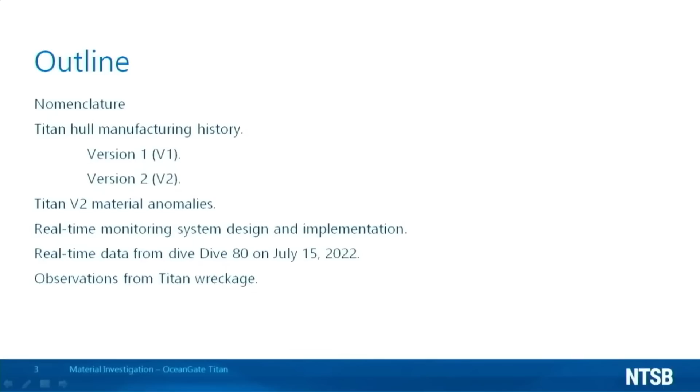Today, I'm going to present some results of the Materials Group investigation into the implosion of the OceanGate submersible Titan. After some nomenclature, the presentation will be broadly divided into two parts. In the first part, I will describe what we have learned about the construction of the Titan's composite hull and the implementation of its real-time monitoring system.

I'll briefly discuss the version 1 hull, then move on to the second, or V2 hull.

This hull was manufactured using a multi-step co-bonding process that was different than the V1 hull in that it contains multiple adhesive bonded joints. We were able to examine some material from the manufacturing of the V2 hull, and we found several anomalies within the composite and the adhesive joints, including waviness, wrinkles, porosity, and voids. I'll show examples of those as well as some features consistent with rubbing damage at one of those adhesive joints.

Next, I'll recap the Titan's real-time monitoring system. I'll talk briefly about the principles behind these methods and review how OceanGate implemented them on Titan. The second part of my presentation will focus on changes in the mechanical response of the hull following Dive 80 and observations gathered from images of the wreckage on the ocean floor.

I'll show that the Titan's real-time monitoring system detected the loud bang that we've heard about previously, and that the strain response of the hull changed on subsequent dives after the bang. I'll finish with some images from the Titan wreckage. These will show that the composite hull experienced substantial delaminations at or adjacent to two of the hull's co-bonded joints.

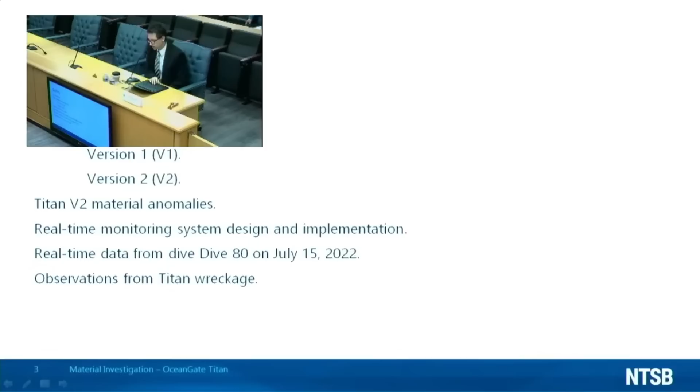I'll begin with some basic nomenclature. The first term to define is composite. A composite in general is any material made up of more than one material, but as applied to Titan, it refers to unidirectional carbon fibers that are embedded in and reinforced by a hardened polymer matrix.

OceanGate utilized several methods of fabricating composite structures from unidirectional fiber. One was wet winding. For this method, the fiber starts out dry and is dipped into a liquid resin bath by the user at the point of use.

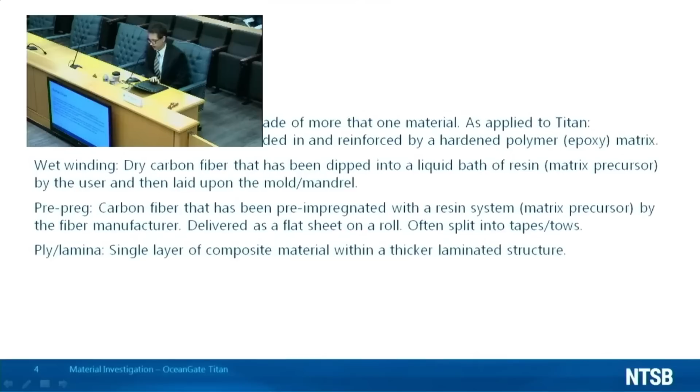The other is pre-preg. In pre-preg systems, the carbon fiber is pre-impregnated with resin by the fiber manufacturer, and is often delivered as a flat sheet on a roll. It can then be split into tapes or tows.

Here's an example of a pre-preg splitting operation. This is a comparatively small machine and would probably not have been sufficient for the amount of fiber that OceanGate needed for Titan, but it illustrates the idea of splitting.

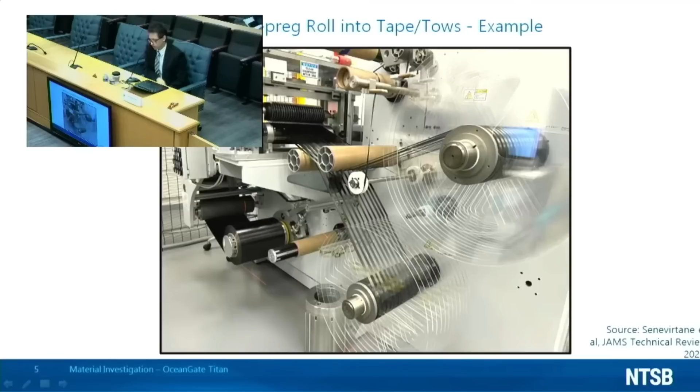A rolled up sheet of pre-preg is loaded into the machine and is sent through a series of cutters, producing a large number of tapes or tows. The tows are then rewound onto individual spools.

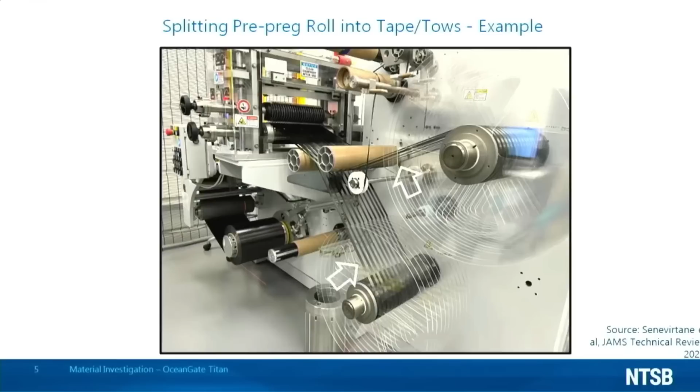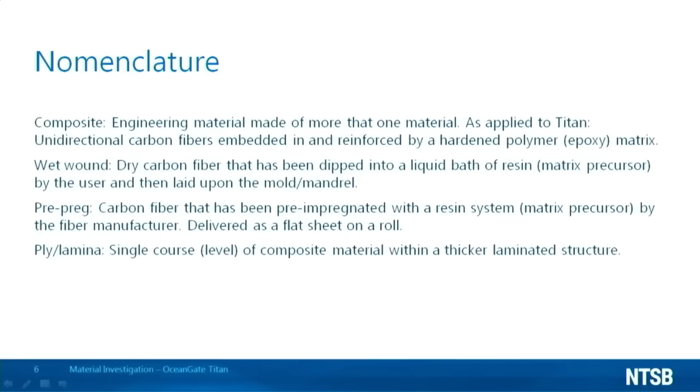One of these individual tows could contain thousands or even tens of thousands of individual carbon fibers, depending on its width and thickness. The pre-preg tapes we saw in the previous slide are clearly very thin, so objects built up using layers and layers of these tapes will have a laminated structure. One course or level of unidirectional material is a ply or lamina.

I'll now discuss the manufacturing of Titan's composite hull. The Titan V1 cylindrical composite hull was manufactured in 2017 and was at the core of the Titan pressure vessel. The hull was manufactured using a combination of wet wound fiber for the circumferential plies and pre-preg for the longitudinal plies.

The ends of the cylindrical hull were capped by titanium rings called segments that were glued to each end. The segments in turn were mated to hemispherical titanium domes that were bolted on at either end, and the forward dome contained an affordance for the viewport.

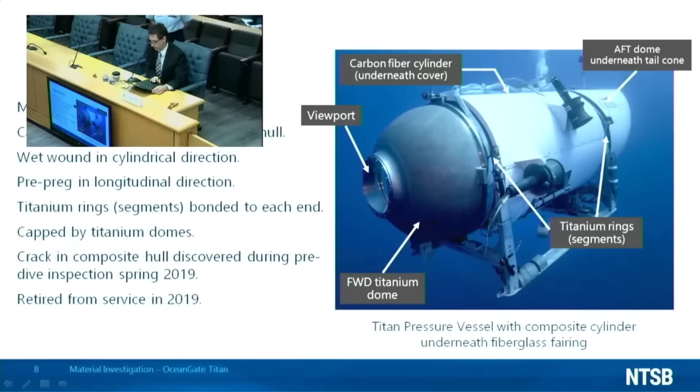As previously noted, a crack was discovered in the composite hull and it was retired from service in 2019.

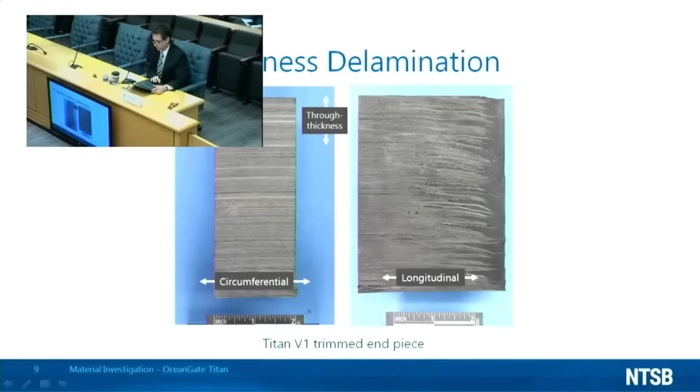Investigators had the opportunity to examine a leftover piece of the Titan V1 hull. The hull was originally manufactured with excess material at both ends, and then the hull was trimmed to size. The leftover piece was trimmed excess material from one of those ends.

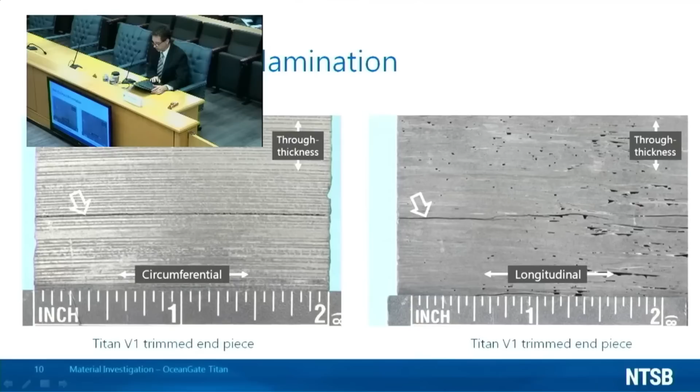The piece contained voids and delaminations. One notable delamination was located about mid-thickness and is shown from different directions in these two images as indicated by the white arrows. After OceanGate retired the V1 hull, they manufactured two 1/3 scale test articles.

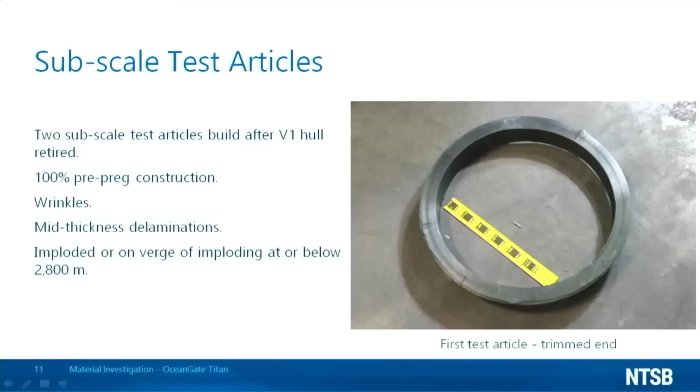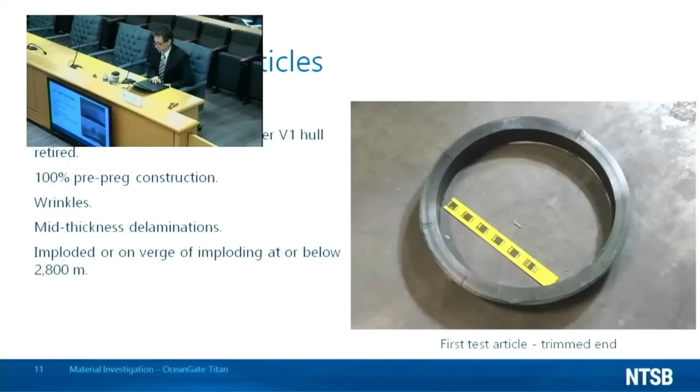Just like the Titan V1 hull, those cylinders were manufactured with extra material on both ends, and then the cylinder was trimmed to size. One of those trimmed end pieces is shown in this image, and in greater detail in these images.

The trimmed end piece contained two notable wrinkles and a mid-thickness delamination as indicated by the arrow in the upper image.

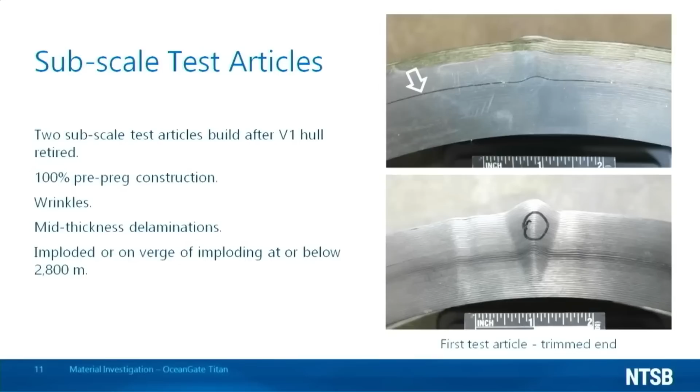According to multiple former directors of engineering for OceanGate, both subscale test articles imploded or were on the verge of imploding at or below 2,800 meters. OceanGate identified wrinkles as a likely cause of the low implosion pressure.

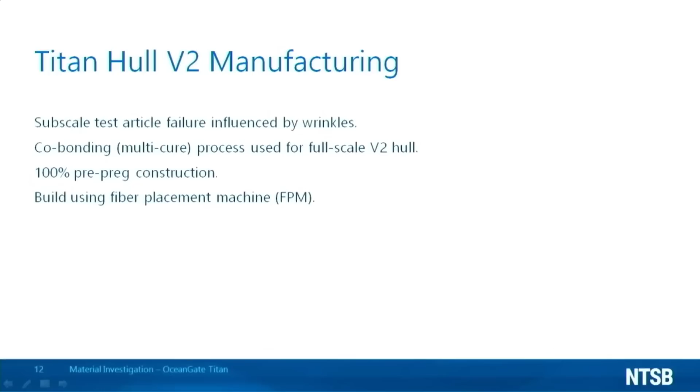In order to mitigate the wrinkle problem, OceanGate pursued a co-bonding process, which I'll describe in a couple of slides. After building a couple of test rings to test the viability of the co-bonding process, OceanGate proceeded with building a full-scale version 2 hull for Titan.

The full-scale V2 hull was manufactured by automatic fiber placement. This is a robotic system that, in this case, was probably attached to an overhead rail and trolley system and contained multiple spools of pre-preg tape loaded into a fiber placement head. The head can apply multiple tapes in multiple directions.

For the first two plies, the tapes were applied in the circumferential direction, like a spiral from one end of the hull to the other. For the third ply, the tapes were applied in the longitudinal direction. The sequence was then repeated until 133 plies, approximately 1 inch of pre-preg material, had been applied to the hull.

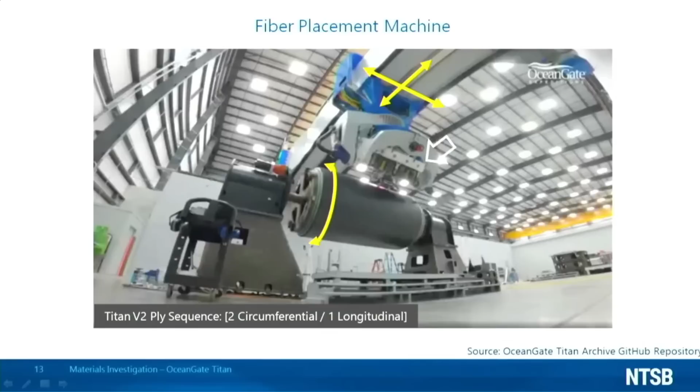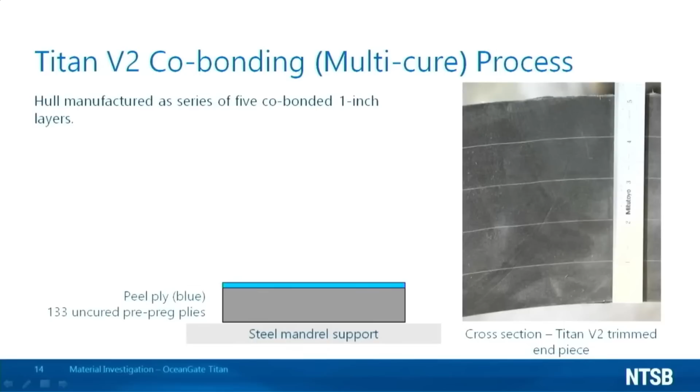The hull then proceeded to curing and co-bonding. The co-bonding process, or multi-cure process, as it was sometimes referred to by OceanGate, involved building up the composite hull in 1 inch layer increments.

After the first inch of pre-preg was applied, the layer was capped by a peel ply. This peel ply was a plain woven synthetic fabric that was designed to be removed later. The assembly was then cured at elevated temperature and pressure in an autoclave.

After curing, the peel ply was stripped from the surface. The act of stripping the peel ply is intended to create an active surface for adhesive bonding. After peel ply removal, bulges in the hull were removed by grinding.

A layer of film adhesive was applied, followed by another inch of pre-preg, capped once again by a peel ply. The assembly was once again sent to the autoclave for curing. This process was repeated until a nominally 5-inch thick hull was produced.

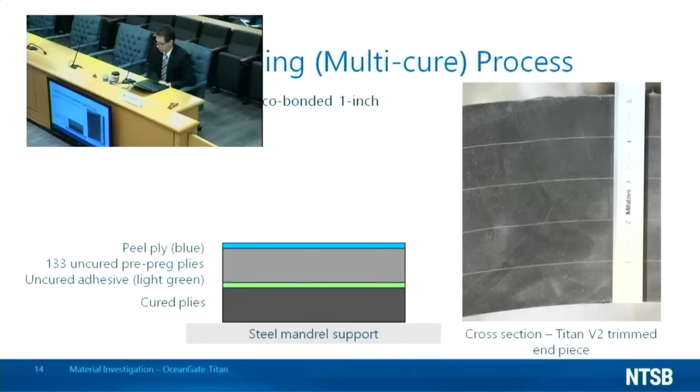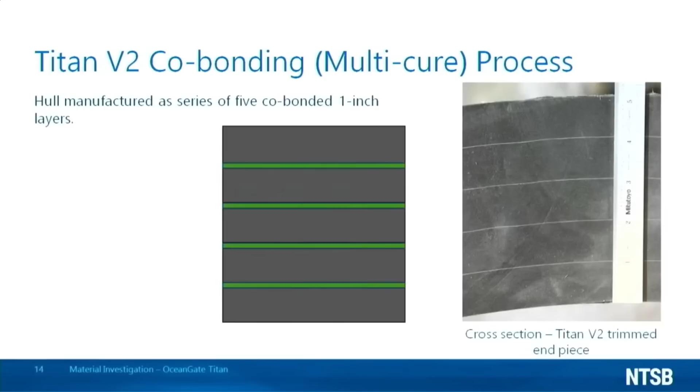The image on the right shows a cross-section through a trimmed end piece of the hull. The lighter lines spaced about 1 inch apart are the layers of film adhesive used to join the carbon fiber composite layers. This image shows the rough V2 hull upon completion.

The rough hull was manufactured with excess material at either end, which was subsequently trimmed off. The materials group examined trimmed end pieces and a recovered piece of the V2 hull and found waviness, wrinkles, and porosity within the composite layers and voids within the adhesive that joined the layers.

The Titan hull exhibited waviness and wrinkles within the hull layers, especially the 2nd through the 5th layers. The image on the left is an overview image of one of the trimmed ends. The image on the right shows a portion of the through thickness face under oblique lighting.

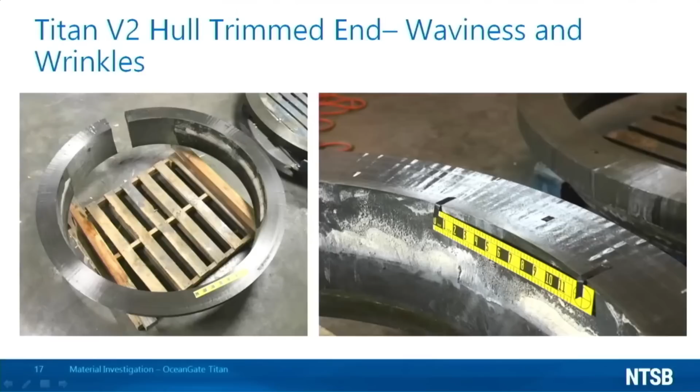The oblique lighting reflects off of the composite plies based on their orientation. The periodic light-dark reflections are an indication of the waviness of the layered structure.

We examined the trimmed end in closer detail and found instances where wrinkles had been ground flush with the outer surface prior to the building of the next layer. The image on the left shows an example of wrinkle grinding.

A thorough examination of one of the trimmed ends indicated that the number of ground wrinkles increased with each successive layer, peaking at 24 for the fourth layer. No grinding was performed on layer 5 as it was the last layer.

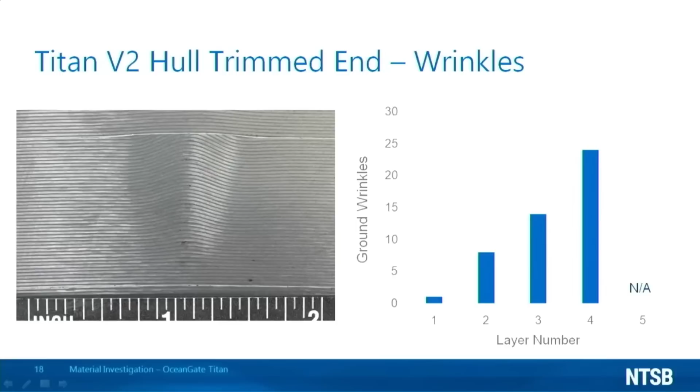It should be noted that the number of plies removed by grinding varied significantly. In a survey on a block of material brought back to the lab, the number of plies removed by grinding varied from 1 to 12.

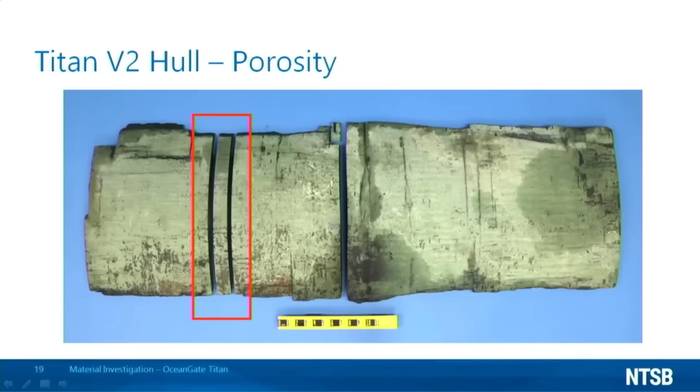We also observed porosity between composite plies. This is an image of a single layer piece of the hull that was retrieved from the ocean floor. The side that is shown is the adhesive used to join two layers. The other side is painted, indicating that it is the innermost layer, or layer 1. A strip has been cut out to evaluate the through thickness material structure.

The amount of porosity within these resin layers was estimated to be between 18 and 27%. Finally, investigators observed voids in the adhesive used to join the co-bonded layers.

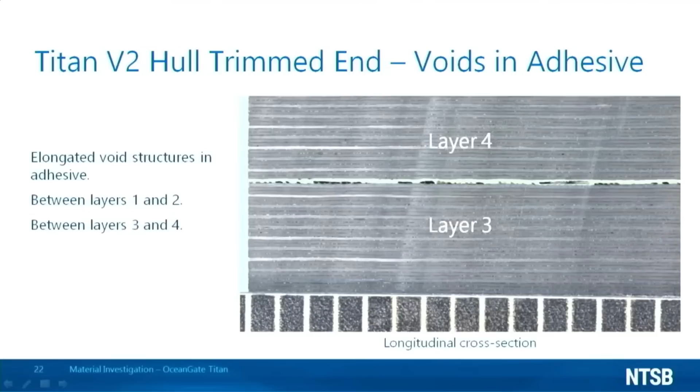Some voids were present in all layers. However, at the interface between the first and second layers and between the third and fourth layers, some of the voids formed elongated structures in the adhesive. These structures were visible on longitudinal cross-sections like the one shown.

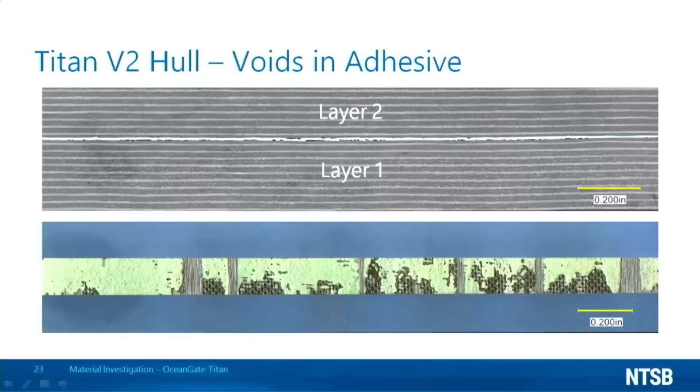The appearance and structure of the voids within the adhesive bond is illustrated by this laboratory fracture. A thin strip of hull material at the layer 1 and layer 2 adhesive joint was snapped open, and the resulting fracture surface is shown in the lower image. 3 distinct regions were seen on the fracture surface.

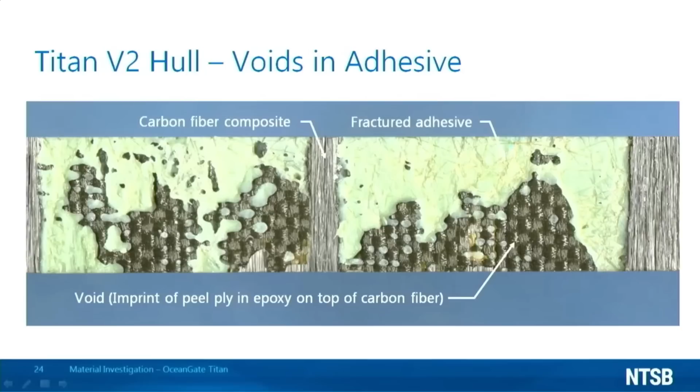The green regions are fractured adhesive. The vertical linear features are fractures through the carbon fiber composite. The checkerboard-like regions are thin layers of hardened epoxy that are above the carbon fiber composite but beneath the adhesive. The checkerboard patterns were left behind by the peel ply that was used during the curing process and then subsequently removed. The areas where you see this pattern were associated with the voids.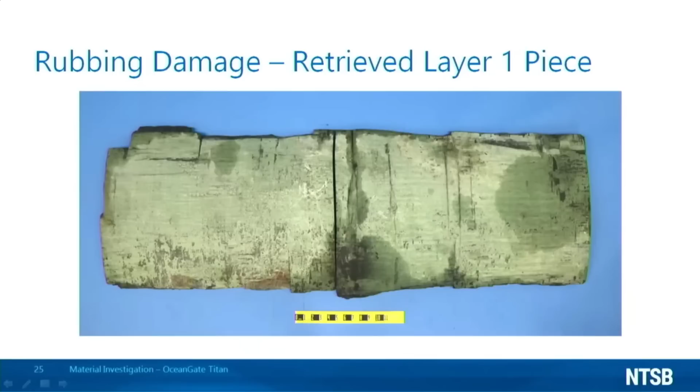Examination of the retrieved single-layer hull piece also revealed features that were consistent with rubbing damage on the adhesive surface. Voids were observed on the surface of the piece, like those observed on the trimmed end.

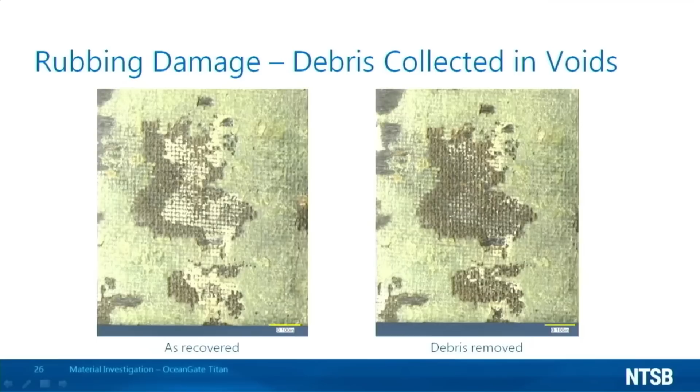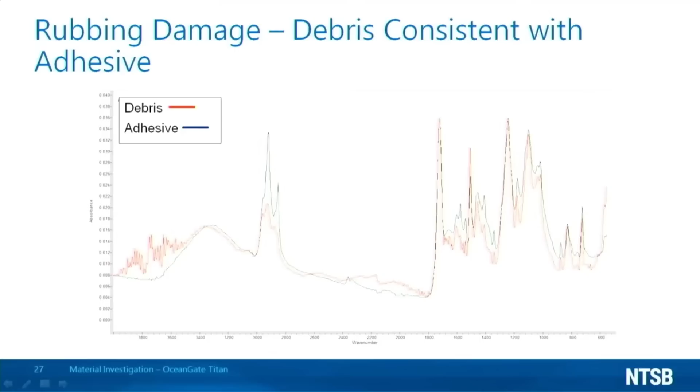As shown in the images above, some of these voids contained cream-colored debris that was readily removed with the tip of a fine blade and a synthetic bristle brush. The debris was collected and its chemical spectrum was analyzed along with a sample of the green film adhesive. As seen in this image, the debris and the adhesive had similar spectral peak positions and relative peak intensities.

This system comprised 2 sensor types. The first type, of course, was acoustic event detection, and the second was the monitoring of mechanical strain or deformation. I'll start by discussing the acoustic monitoring system.

The Titan's acoustic monitoring system functioned on the principle that fractures and other forms of material damage create sound waves. These sound waves can be detected using acoustic sensors. These sensors are just tiny microphones that can be affixed to a surface and trained to listen for sounds associated with breakdown of the material. This is a complex but established field of engineering.

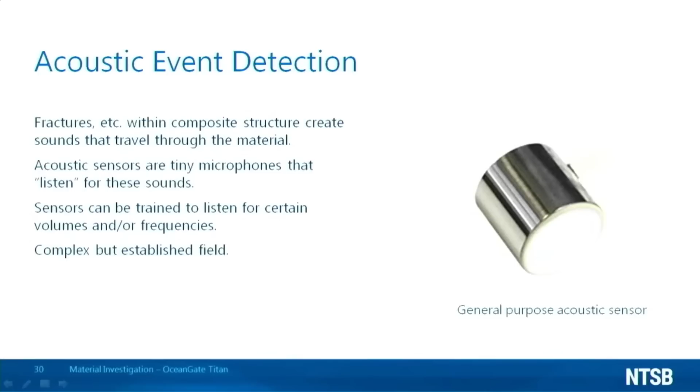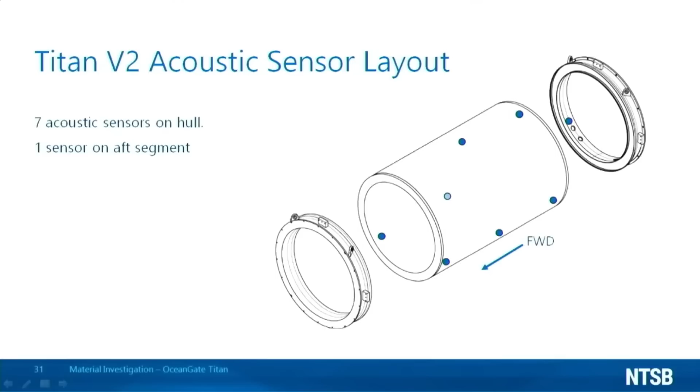The Titan's acoustic monitoring system comprised 8 sensors, with 7 attached to the inner surface of the hull and 1 attached to the inner surface of the aft titanium segment. On the hull, 2 were located at the forward end, 3 were in the middle, and 2 were at the aft end. The system listened for acoustic events that exceeded a predetermined amplitude, and when it detected one, it counted it as a hit and added it to a running tally of the total number of hits.

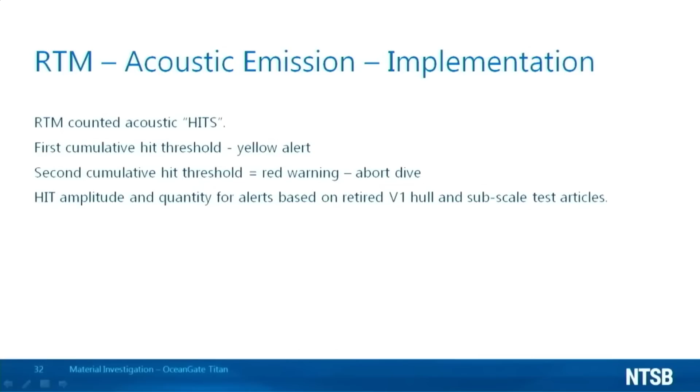There were two thresholds for the number of hits. The first threshold issued a yellow alert, and the second issued a red warning, at which point the dive was to be aborted. The amplitude and quantity of hits were established based on acoustic activity from the retired V1 hull and the subscale test articles.

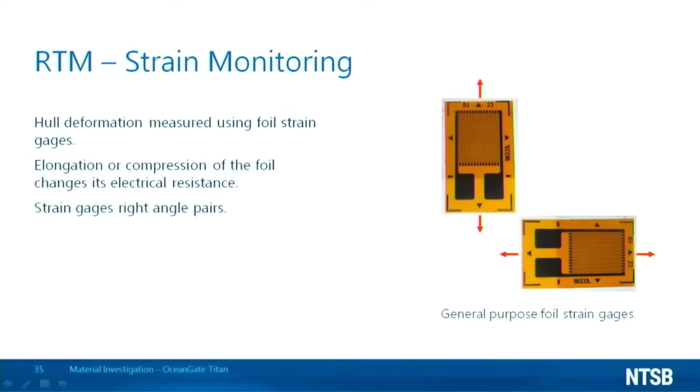Next, I'll discuss the strain monitoring system. Titan monitored hull strain using readily available metal foil strain gauges. As these gauges stretch or compress, the resistance of the metal foil changes, and hooking the gauges into a circuit and measuring the voltage drop across the gauge terminals enables the measurement of strain. The gauges were grouped into right angle pairs as illustrated on the right.

There were 8 strain gauge pairs on Titan. 5 gauge pairs were located on the hull, and 1 pair was located on the aft segment. 2 gauge pairs were originally located on the forward dome during testing at the Deep Ocean Test Facility and may have been moved to other locations on the hull.

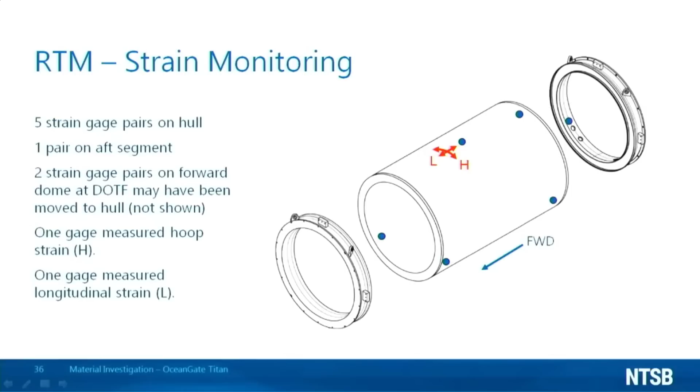As illustrated by the red arrows on the image, 1 gauge in the pair was aligned in the circumferential direction and measured hoop strain. The other gauge was aligned along the axis of the cylinder and measured longitudinal strain.

On July 15, 2022, Titan executed a dive to the Titanic, entered into the dive log as dive 80. Upon returning to the surface, the crew heard a loud bang, which was documented by the pilot in the OceanGate dive log and has been discussed at this hearing. This was the 14th dive to a notable depth for Titan V2 since initial deployment and the 6th notable dive of the 2022 expedition. The real-time monitoring system captured this loud bang, and it also captured changes in the hull's strain response after the bang.

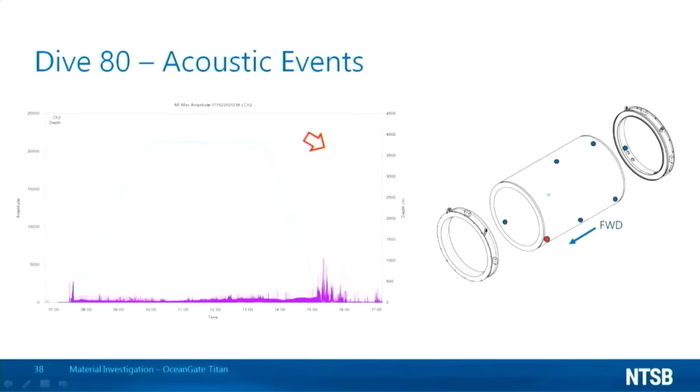The audible event was captured as indicated by the acoustic activity plot on the left. The sensor shown here was located at the forward port side of the hull. The horizontal axis displays time, and the vertical axis displays both acoustic event amplitude and dive depth.

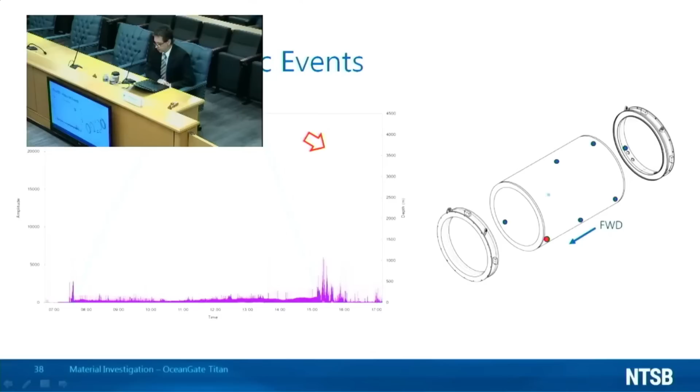The acoustic activity increased upon returning to the surface leading up to the event, which is indicated by the red arrow. Several strain gauges also responded to this event.

Lieutenant Steele, could we go back and try to get back on that page? It looks like it's not loading.

This is also presented in the materials lab factual reports. So if need be, interested individuals can refer to the factual report.

Referring to slide 40, when plotted together, one can see that the sudden change in strain gauge readout coincides with the large acoustic event. Some of the gauges showed a change in strain response after dive 80.

OceanGate strain data was typically, and perhaps always, plotted as a function of time. The changes in mechanical response are easier to visualize by plotting the strain against dive depth, as shown here for the hoop strain at gauge group 4. Plotting the data in this manner is more akin to a stress strain plot, which is a standard way of visualizing this type of data.

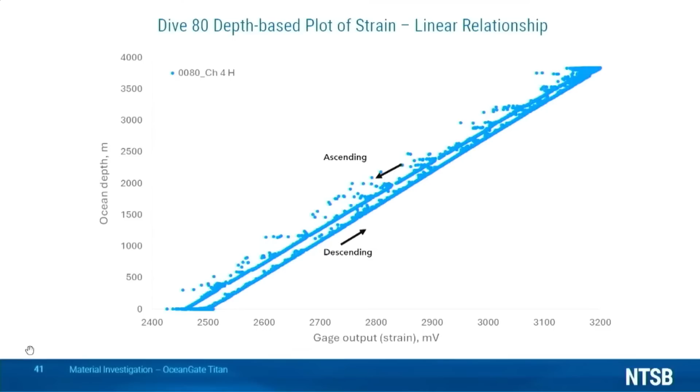For dive 80, prior to the event, the relationship between strain and dive depth was a straight line for both the descent and the ascent. Going backwards in time by 5 dives and comparing dive 80 to an earlier dive 75 reveals no significant change from dive to dive. Moving forward in time and looking at dive 81, the dive immediately after the event, we see a change in the initial strain response of the hull.

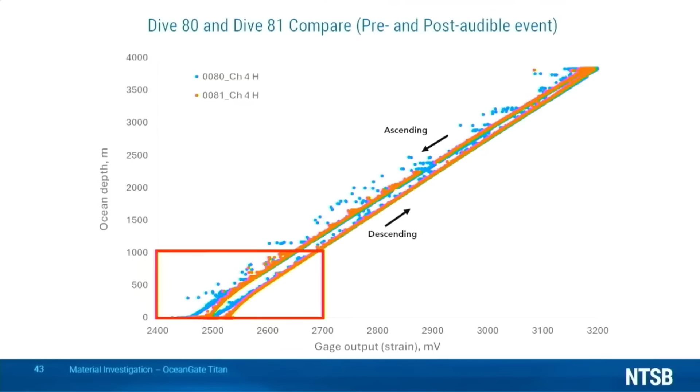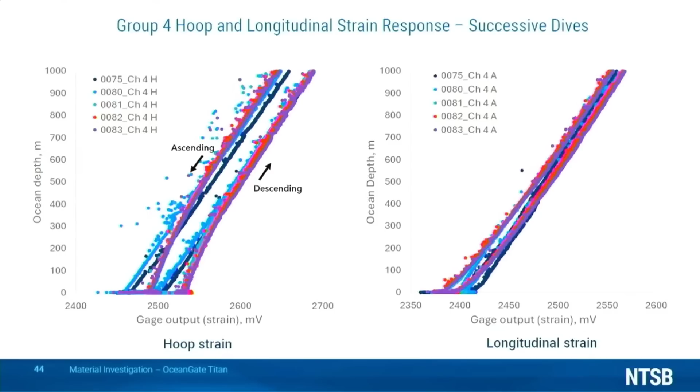The next slide focuses on the initial and final 1,000 meters of the dive. The graph on the left shows the hoop strain, and the graph on the right shows the longitudinal strain. Changes in the initial strain response are seen in both directions. Furthermore, the changes persist from dive 81 through dive 83, which is the last dive for which we have strain data.

Changes in strain response after dive 80 were also seen for the longitudinal strain for gauge group 5, and to a lesser extent for the hoop strain at gauge group 8. Those changes also persisted for dives 82 and 83. There were no apparent changes for groups 3 or 7.

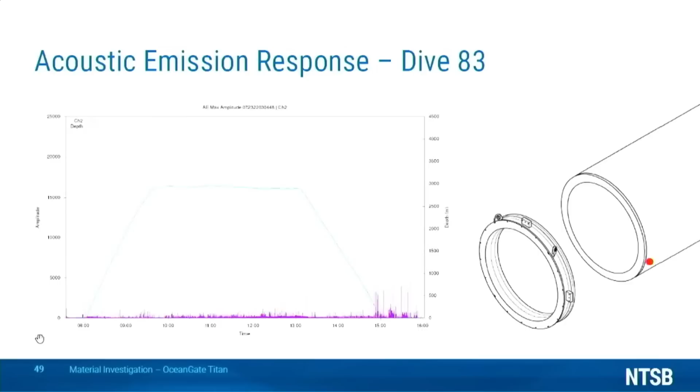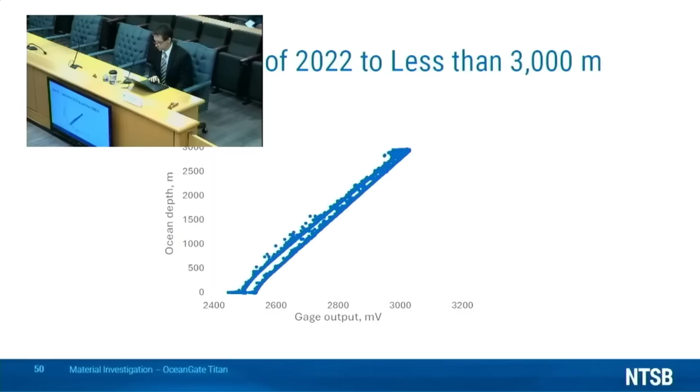One note about dive 83: this dive did not take place at the Titanic wreck site and did not go to the same depth as the other dives. According to the dive log, it reached a depth of 2,954 meters. This is the last dive for which acoustic emission and strain data is available.

For the final part of my presentation, I'll go over some images of the Titan wreckage, where we will see that the hull encountered a significant amount of delamination, the majority of it within or adjacent to co-bonded adhesive interfaces.

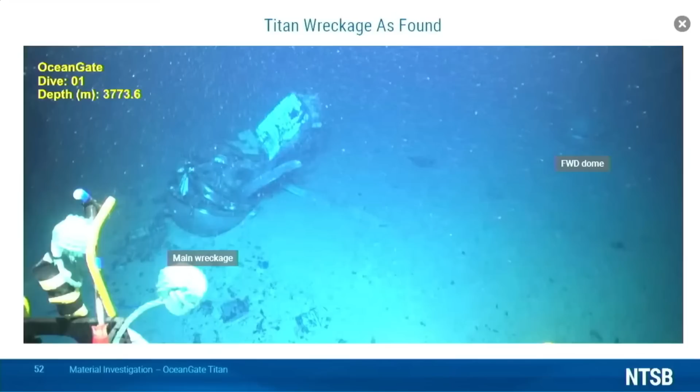This image shows the Titan wreckage as it was discovered on the ocean floor. The aft dome, aft segment, top rail, side rails, and the aft portion of the composite hull were located together. The forward dome, shown to the right, the forward segment, and the tail section were each found by themselves. Much of the forward hull had fragmented into multiple pieces spread around the ocean floor.

One segment of the hull, near the top of the vessel, was intact nearly along its entire length and stayed with the main wreckage. This is an image of the single layer piece that was recovered and examined at the laboratory. This piece was located approximately 350 feet from the main wreckage and had a piece of lead wedged in a crevice. Here's another view of the main wreckage.

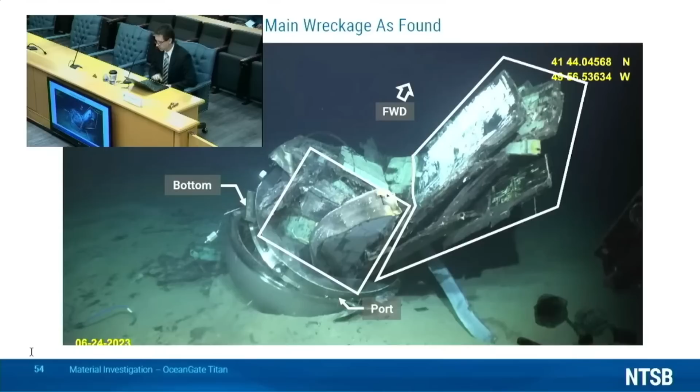From this view, two notable pieces of the wreckage are visible and indicated. One is the piece that extends nearly the entire length of the hull near the top, and the other is a piece on the port side as indicated by the white outlines. This image shows these two pieces laying flat on the ocean floor during a recovery mission.

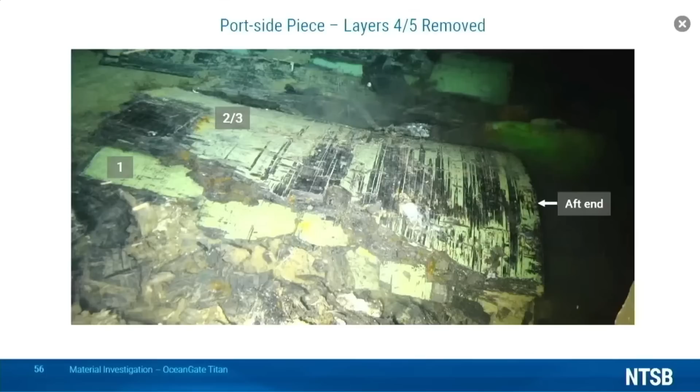The delamination between the innermost shell and the middle shell—could you please go back, actually? So the delamination between the innermost shell and the middle shell occurred within the adhesive at the layer 1, layer 2 interface for all the pieces that could be examined. This was seen earlier on the single layer piece at the forward end of the hull, and it can be seen here for the layer that's labeled 1 at the lower right of the image.

Another layer 1 piece is hidden on this image but is visible on the next slide. It too shows separation within the adhesive. The delamination between the middle shell and the outer shell shows a more complex separation pattern.

For the piece that was located on the port side, shown on the left, we can see the green adhesive at the top of layer 3, consistent with separation within the adhesive. Looking at this same piece, with the outer shell removed, we see that toward the aft end, there's a mixed region where some of the separation took place within the adhesive and some within the adjoining composite layer. At the forward end, there's also a square patch of composite material still attached to the surface.

Also of note for this piece, the outer shell consisting of layers 4 and 5 was fractured through the layers and a chunk of it was missing, which is why the top surface of layer 3 is visible. These through thickness fractures were not found in the middle shell.

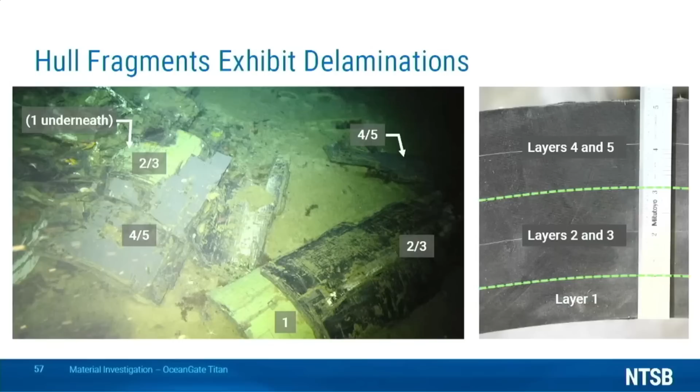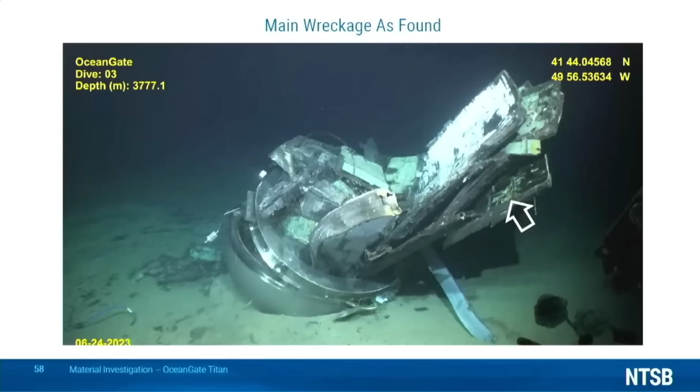The outer shell consisting of layers 4 and 5 is labeled in the background at the top of this image and is highlighted on the next slide. From this point of view, the green adhesive at the bonded joint can be seen on the inside of the 4th layer. Delamination features were also observed on other pieces of the hull. Images and descriptions of those pieces are contained within the NTSB factual reports.

To summarize, the Titan V2 hull was manufactured from pre-preg unidirectional carbon fiber using a co-bonding process with multiple adhesive interfaces. Examination of the hull material revealed waviness, wrinkles, porosity, and voids within the multi-layered structure. A recovered piece of the hull exhibited features consistent with rubbing.

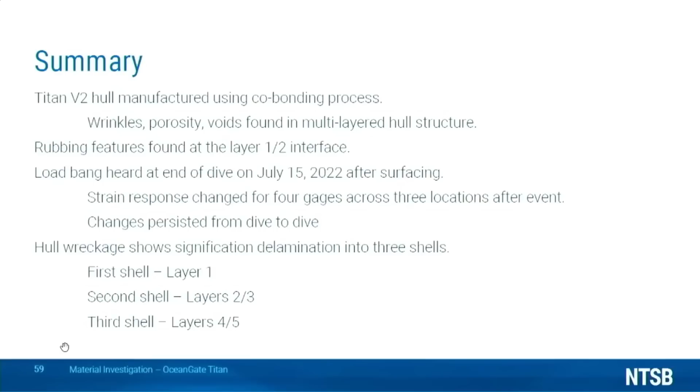Examination of strain gauge data after the dive 80 event showed a change in the mechanical response of the hull for 4 strain gauges across 3 locations of the hull. Those changes persisted from dive to dive. As just described, the composite hull showed significant delamination into 3 shells: a shell comprising layer 1, a shell comprising layers 2 and 3, and a shell comprising layers 4 and 5.

This brings me to the end of my prepared testimony. I would like to thank the Coast Guard for the opportunity to present these findings and would be happy to answer questions at this time.

Dr. Kramer, thank you for that thorough presentation and all of the forensics working up to that. We appreciate your time and also your collaboration with the other substantially interested states to the investigation and the Coast Guard. Lieutenant Commander Williams has questions for you, sir.

Dr. Kramer, can you explain to me how a wrinkle would form in carbon fiber? So the way that the wrinkle likely formed for OceanGate was during what would be called a debulk, or vacuum bagging, part of the procedure. To consolidate the layer, they would wrap the entire assembly in an impermeable bag and then apply a vacuum. This is to try to remove excess voids or excess open volume, which causes a compression or consolidation of the material against the mandrel or the form.

As you noted, the second hull, or V2, was cured after each 1-inch layer in an autoclave. Can you explain to us what an autoclave is and its purpose? Sure. So an autoclave is an oven where you can increase the atmospheric pressure, and the purpose of increasing the atmospheric pressure is to increase the external force on the composite as it is curing, so that you can remove as much voids and porosity as possible and consolidate the material as best as you can.

I'd like to go back to the diagrams that you have outlined on slide 33. Lieutenant Steele, could you bring up slide 33? This slide is the location of the acoustic emission sensors. As you noted, the blue sensors mean that the sensor was working, and the red means that there was no acoustic activity detected. As we know, Channel 2, Channel 4, and Channel 7 all had full-scale acoustic emissions.

You should have a laser pointer in front of you. Can you show me on your diagram where those sensors were located? Okay, so Channel 2 would be there, at the forward end of the hull on the port side. Channel 4 would be in the middle of the hull at the top.

And sorry, can you remind me again, what was Channel 7? I believe this is Channel 7. I believe Channel 7 is also on the top of the hull at the aft end.

We also noted from the real-time monitoring data that Channel 6 and Channel 8 had acoustic emissions, but they were not full scale. Can you show me where Channel 6 and Channel 8 are located on the diagram? So Channel 6 would be on the aft titanium segment or ring, and Channel 8 would be right here on the lower port side at the aft end of the hull.

Earlier, we had discussed that the acoustic emission sensors 1, 3, and 5 had little to no activity. I wanted to confirm that AE sensors 1, 3, and 5 are the ones shown in red on your diagram. That is correct.

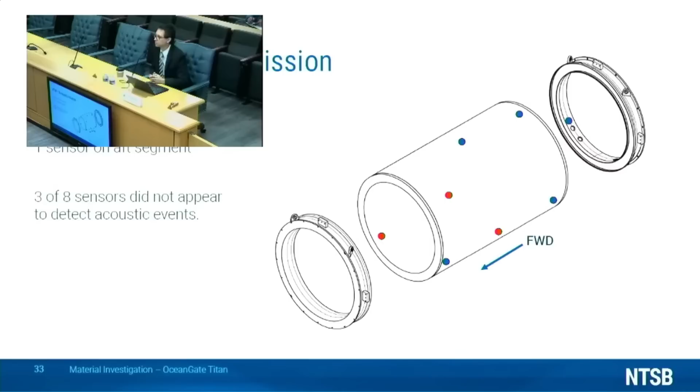In your presentation, you noted that there was dust present in the peel ply impression between layers 1 and 2, which is slides 26 and 27 of your presentation. I wanted to confirm that the test you conducted showed that the dust was consistent with being the same material as that of the adhesive layer. Okay, I think at this point the only way I can really respond to that is: when we examined the debris and a piece of the adhesive using a Fourier transform infrared spectroscopy system, they produced spectra that have similar peak positions and similar peak intensities. The wave number positions and the intensities are indications of the types of molecular structures present in the sample. I think at this point that's about all I can say to that.

Thank you. Did you conduct material testing on the cut-off ends of the carbon fiber hull? So we did conduct some material testing of the material. We conducted one type of test. Well, actually, okay, go ahead with your question.

To confirm, the cut-off ends—those were from the second hull, correct? That's correct. And what material tests did you conduct on the cut-off ends of that second hull? Okay, so on the cut-off end, the test we conducted was a through-thickness shear type test. We also conducted some material testing on the recovered hull piece: a longitudinal compression test of the carbon fiber, and we also submitted a sample for porosity measurement. But those two samples were from the recovered piece.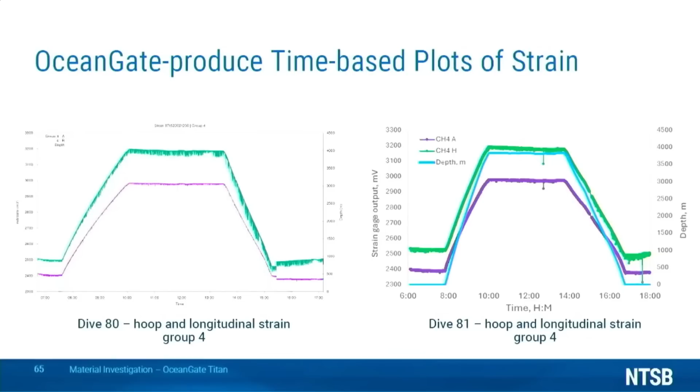So, Lieutenant Steele, could you bring up slide 65? This slide here shows the hoop and longitudinal strain gauge output for Group 4, for Dive 80, and for Dive 81. The graph on the left is the original OceanGate data as I received it.

I did go ahead and replot it for Dive 81 because, as Mr. Brooks testified, occasionally their plotting software would produce strange outputs on occasion, and so it was very difficult to do a side-by-side comparison. But this is the type of data that, as far as we know, OceanGate was producing, and so these would have been the plots that they would have been evaluating.

And so I guess it's a matter of opinion as to whether one can discern the changes in strain output from these graphs.

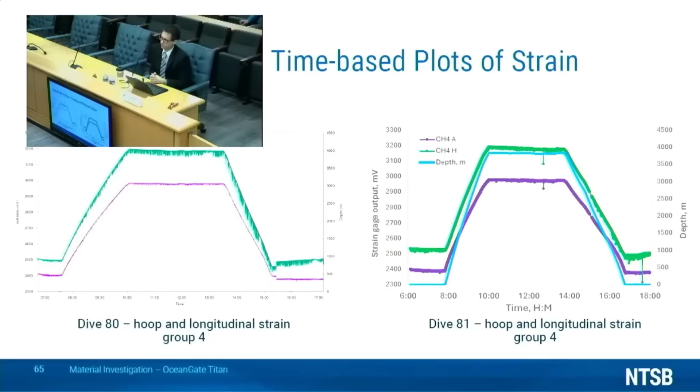Thank you. That concludes my questions. Dr. Kramer, Lieutenant Commander Whalen has a question.

Thank you, Dr. Kramer. When you measured, and we had just discussed measuring the thickness of the version 2 hull, and the number was approximately 5 - what was it, 5 point? It's somewhere between 5/32 and 3/16 above the 5-inch, the nominal 5-inch thickness.

Yeah. Did you do the same tests on the version 1 hull? Or the same measurement, I should say? I did do a thickness measurement on the version 1 hull. And what was that? It was like 4.97. It was slightly below 5 inches.

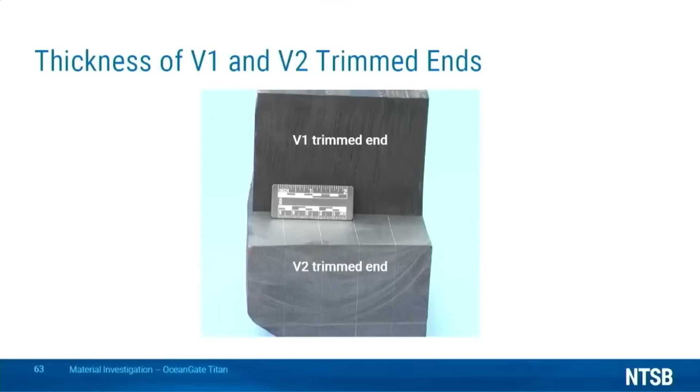Lieutenant Steele, can you? I do have a slide where I have a visual comparison of those two. You can bring that up. That's slide 63. So this slide here shows a piece of the version 1 and a piece of the version 2 trimmed ends stacked on top of one another. So you can, I think, visually see the difference in the thickness of the two hulls.

And that would have been the area of the carbon fiber, not specific to these two as they're trimmed ends, but the width of the carbon fiber as visualized in this is the same as would be on the trimmed off end, which went into the clevis of the titanium ring. That is correct.

And in fact, we did have a chance to examine the outermost shell, the layer 4 and 5 of that very long piece. And we were able to see that the outside of that layer had material removed from it, presumably to bring the thickness down to the level where it could be inserted into the titanium ring.

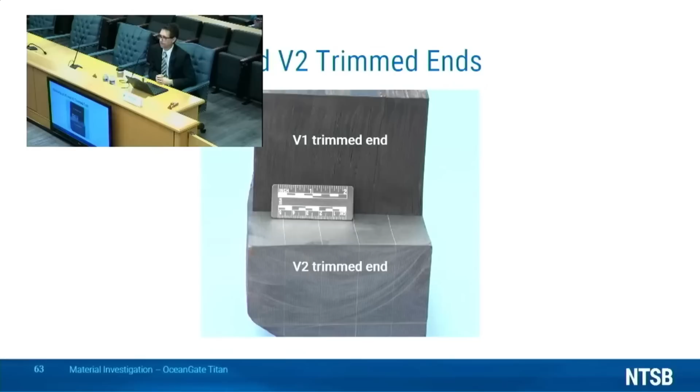And they were the same titanium rings that were used on version 1 and version 2? That's correct. That's my understanding.

Lieutenant Steele, can you bring up slide 34, please? Dr. Kramer, I'm going back to the acoustic emission data from Dive 76.

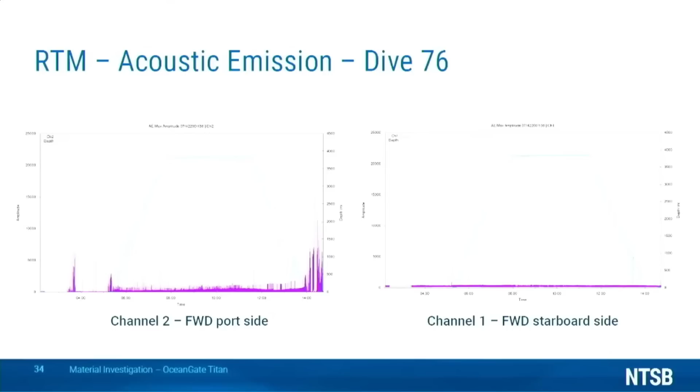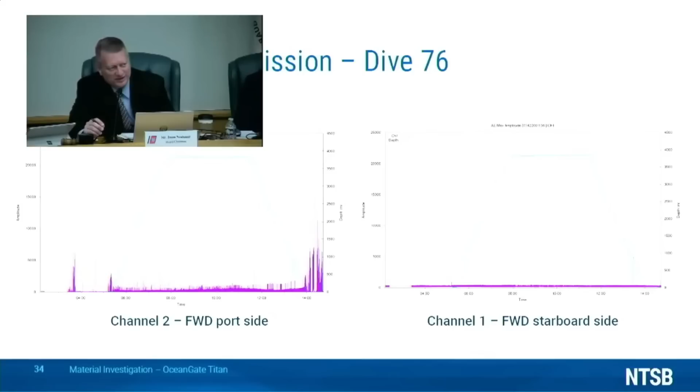This question comes down to trying to figure out if the acoustic sensors were inoperable or just hearing less noise prior to Dive 80. We had previous testimony that the lesser acoustics could be due to a scaling issue from the different graphs, and that's what I want to ask you, sir. Looking at this, is the potential for channel 1 to be a scaling issue? Are these the same scales?

Well, so these two graphs, these two plots are the same scale. So in your opinion, is it likely that the other acoustic sensor is either highly degraded or inoperable? I don't think that I'm in a position to answer that question.

For Dive 80, did you see any indications of an acoustic reading on channel 1 for the loud bang? I think it's fair to say that for any dive we examined in 2022, on the plots we didn't see any on channels 1, 3, and 5. We did not see any indications of notable acoustic events. As you see on this slide, the right graph, the forward starboard sensor, there are occasional blips like the one you see, but in general they do not show the same type of acoustic characteristic that the other sensors show.

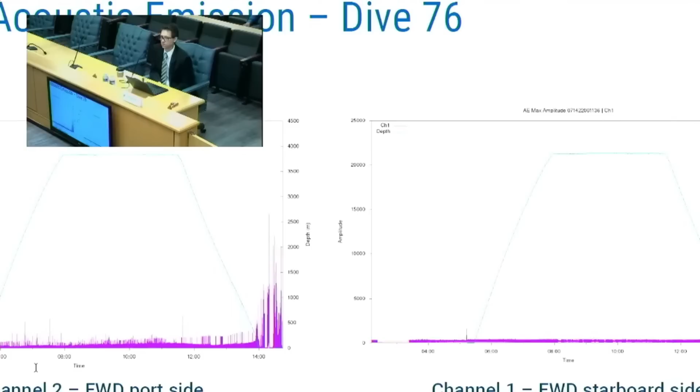Now I'd like to talk about the sanding to fair the hull after each 1-inch layer was applied. Do you know if that sanding was done on carbon fiber layers that were longitudinal or cross-sectional? So for any sanding event that went 3 layers down or more, it would have sanded into both circumferential layers and longitudinal layers, because the repeating stack is 2 plies in the circumferential direction, 1 in the longitudinal direction, and that sequence is repeated until the desired thickness is achieved. So if it's a single layer that's been sanded into, it would depend on which interface it is, because it actually changes from interface to interface what the orientation of the topmost ply is.

And was there a consistent topmost ply? No, because the number of plies was 133, and since that's not evenly divisible by 3, it cycles through the possible top layers essentially. Understand. And sir, if I remember right, you said the deepest sanding you saw was 13 plies? We brought back a block of one of the trimmed end pieces, and on that particular block, I think the largest count we had was 12. So that would essentially be 6 layers, 6 different plies.

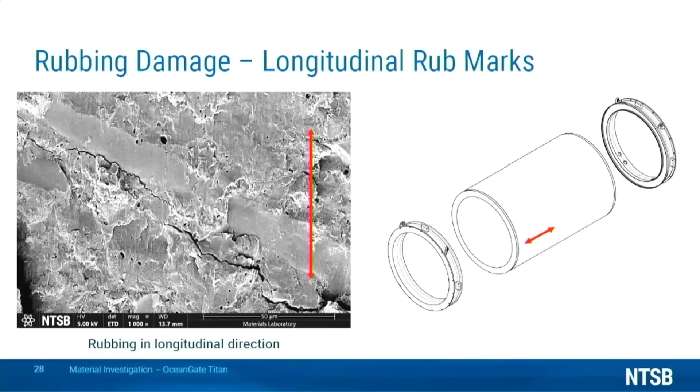Well, I think again that starts to get into the issue of correlating observations with timing, and that starts getting me into analysis. Understand, thank you. Lieutenant Steele, can you call up the slide for dive 80, please?

Dr. Kramer, I want to understand the shift that occurred during the loud bang and what that might indicate from a strain gauge perspective. Is this indicating that the strain gauge moved in relation to the hull, or is it that the strain gauge is receiving data differently? Can you just explain what this means to you?

Does this mean that the hull is now experiencing the strains in a different manner? So it means that there is a sudden change in both the longitudinal and the hoop strain at this particular location of the hull.

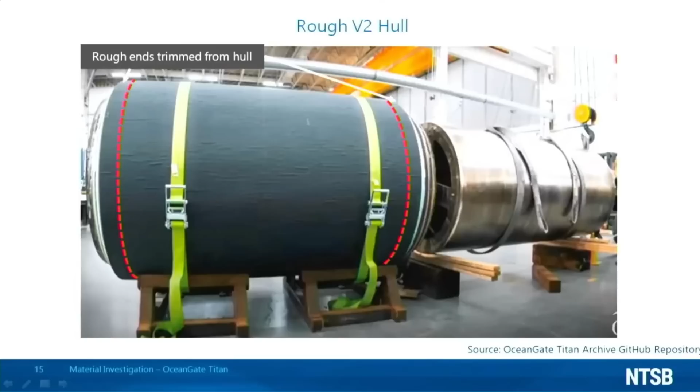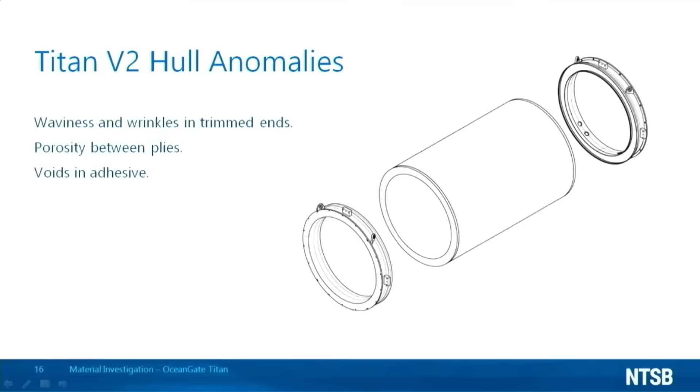We did hear about the sanding operation OceanGate performed to remove imperfections from Titan's hull, which in certain cases approached 10% of a layer being removed, and that was kind of crazy to hear. As was hearing about how material was also removed from the end of the hull to make it fit with the end ring, as that second Titan hull was slightly larger than the first. So, as I said, I think hearing and seeing all of this is incredibly important and insightful - information I think most who still retain an interest have been waiting for since that tragic day in 2023.

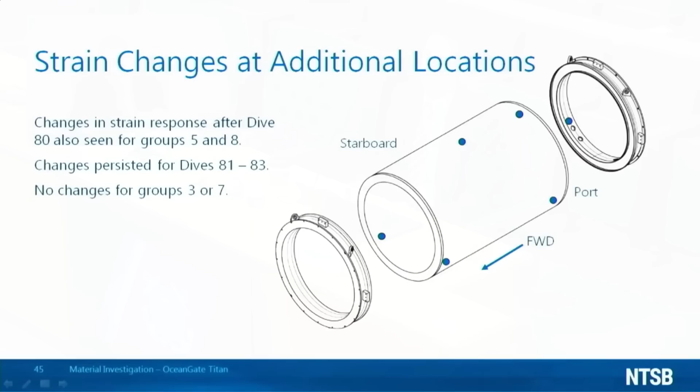I'm not sure if the NTSB's final report will be included within that of the Coast Guard's, but either way, if new information comes to light, I will be sure to cover it all as best as I can. Some things are still delaying that, of course, as mentioned regarding the location of strain gauges, for example, which has some conflicting paperwork, at least according to Phil Brooks's testimony. But in the meantime, as for the remaining testimonies, they do seem like they will be interesting to cover, as upcoming speakers include representatives from NASA and Boeing, as well as from the Coast Guard, plus another former OceanGate employee.